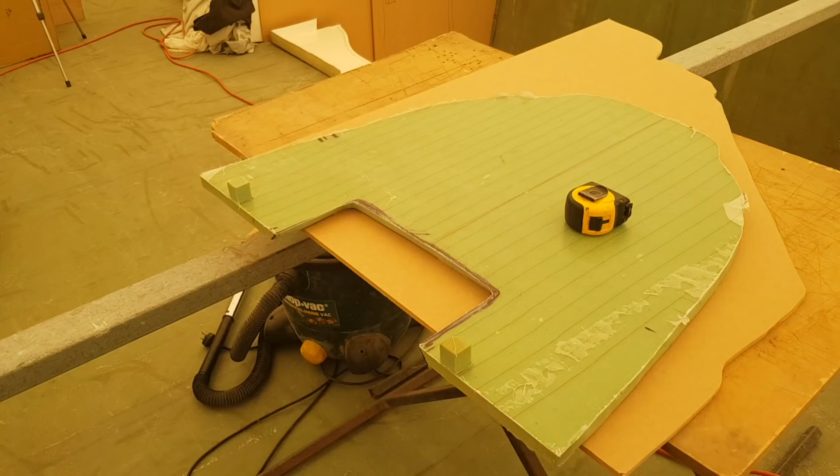So I'm going to use an existing bulkhead. Now, this one actually belongs under this companionway over here at the end of that fuel tank. So the great thing about this is it's almost so close to the other one. I'm going to cut an MDF template and then trim it down rather than get the chain jig in under that bulkhead over there, because it's going to be a bit of an effort. But I'll use this one.

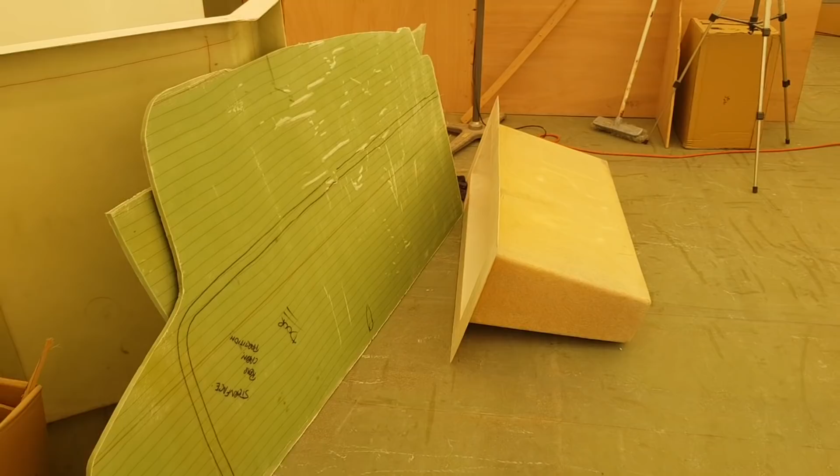You'll notice this mark here. It's actually going to be lower than the floor level. I'm going to allow around 10 centimetres on top of the floor, on top of the tank, to allow for pumps and for hoses and any sort of extra plumbing I need to fit in there. So I'm going to cut this one across here, and then I'll be able to see if it fits, and hopefully it'll transfer to the other side, which I'll do an exact replica on the other side. So I've got 300 here, 300 on the other side there.

One thing you don't realise when you build a boat, like if I was building a monohull, you go down into the hull and you're there. With this bastard, you're up, down, up, down, up, down, constantly.

Hot work, guys, hot work. Right, so I'm down in the build again, but I think the 80th time today.

Got my tunes on in the background, but I'm trying to work out the water tank, and my water tank's actually going to be integrated into the hull. So I'm going to put a bulkhead, another bulkhead, and then a centre baffle with holes in it to allow the water to flow in between and equalise. So I don't end up with sloshing of 150 litres going from one end to the other. So it's a 300 litre tank, 2 end bulkheads, and a centre. And I think that should suffice.

I've done a bit of reading. That seems to be the way to go. So I've used one of the existing templates of the bulkhead, which is about a foot and a half back from this one. And this one here is going to form the back end or the stern end of my water tank, so hopefully it'll fit.

Right, so this here is the stern end of my freshwater tank, and that bulkhead up there, I've actually, luckily, haven't cut out the limber holes yet because I'm not going to, it is the forward end or the bow end of my water tank. I've got to make a baffle somewhere in the middle here, which will just be another bulkhead with some holes in it, so it'll stop the water from flowing back and forth.

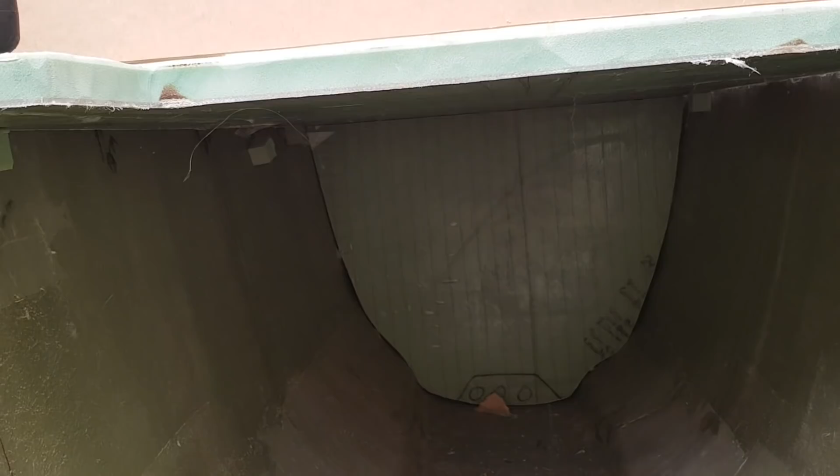So what I'm going to do is try to avoid lifting this bulkhead, the 2 modules out. I'm going to try to chain jig it while it's actually inside, underneath the floor here. Hopefully I'll be able to get in there enough to be able to get a chain jig going. It's not going to be that dissimilar to the back one, but it certainly will be narrower.

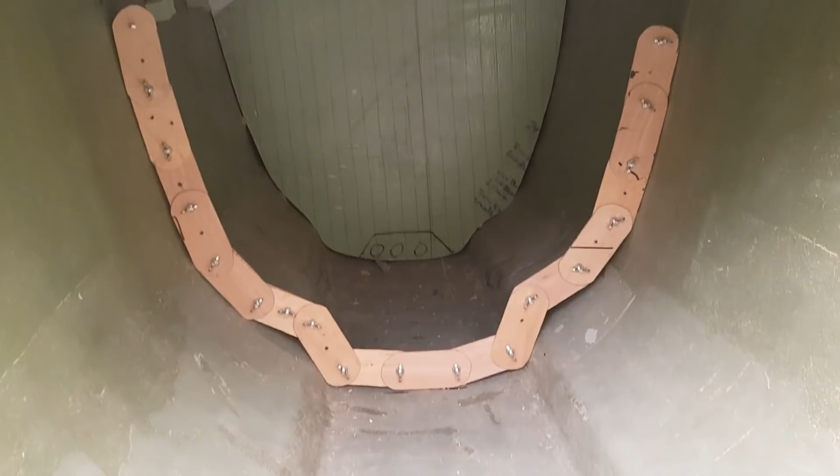Going to need a bit of CAD here, a bit of cardboard aided design, but that's pretty much in the perfect spot. I think I need another biscuit on this side. I want to go full height, and then I'm going to cut it back down. I find that a bit easier than sort of half doing it.

It's like a scene out of The Great Escape. Freaking hell, yeah, she's a bit tight in there. I'm a bit over being in there, but it took me about 10 minutes to get that done, so 10 minutes was long enough. It was like having a freaking MRI in there. The things you do, eh? The things you've got to do to get shit done just cracks me up. Under there you've got to get under and get it out without altering it, and you could.

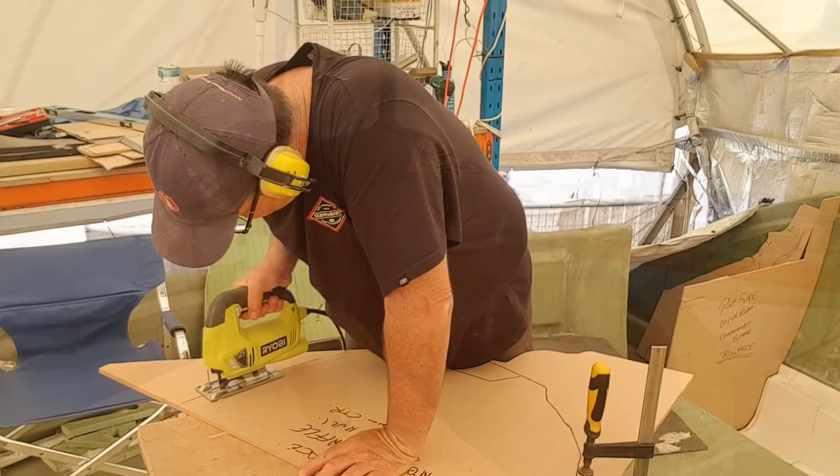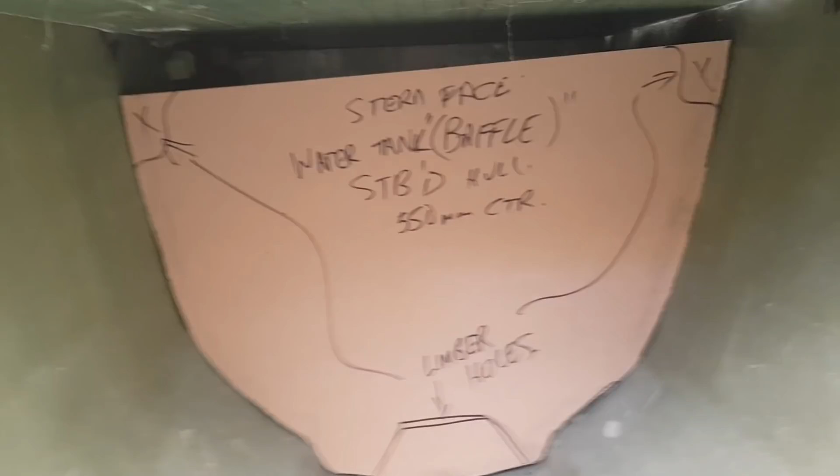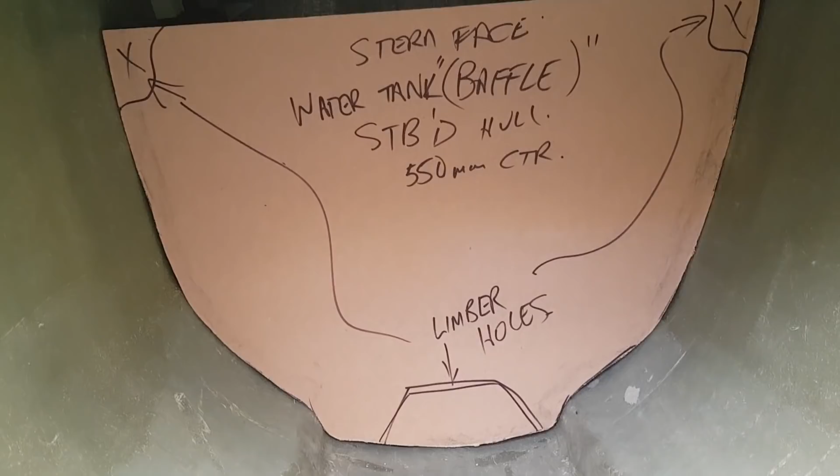It's not very level, I have to try to get it level. That's going to be a bit of a challenge until I lift the roof out, or the floor out, because that's got to come down about 5 centimetres or so. But it's in there, and I should be able to cut a foam core version of that straight away, and get these in straight away virtually.

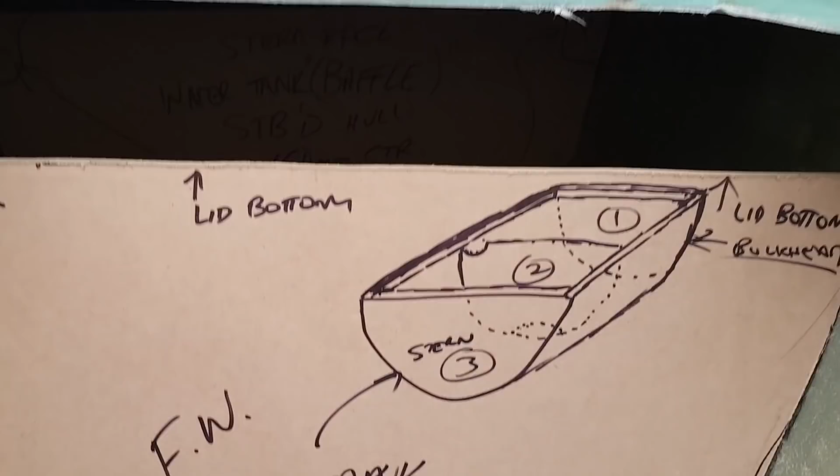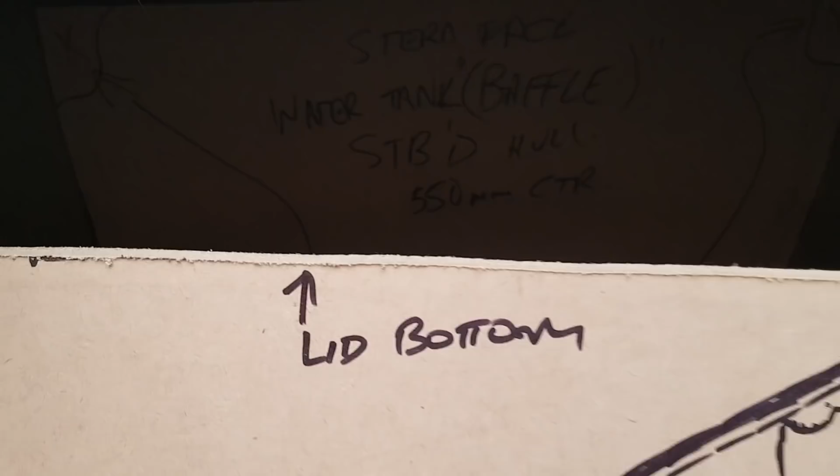So you get the idea, this is what I'm aiming for. This bulkhead here you're looking at is actually this one, another one here with a couple of limber holes in the middle and along the top, and then the forward one is actually the proper bulkhead. So I can essentially look in here now, and there's the second bulkhead in there, and then there's another one in front of that.

So that's my water tank, guys, that's how I'm going to do it. I'll show you a picture of how that's going to be done, and we'll go on from there.

The time's come to work out where the fuel tank fits, and I've made my template. I've just got to make some smaller bulkheads with some limber holes in them with a V in them to carry the load of the tank.

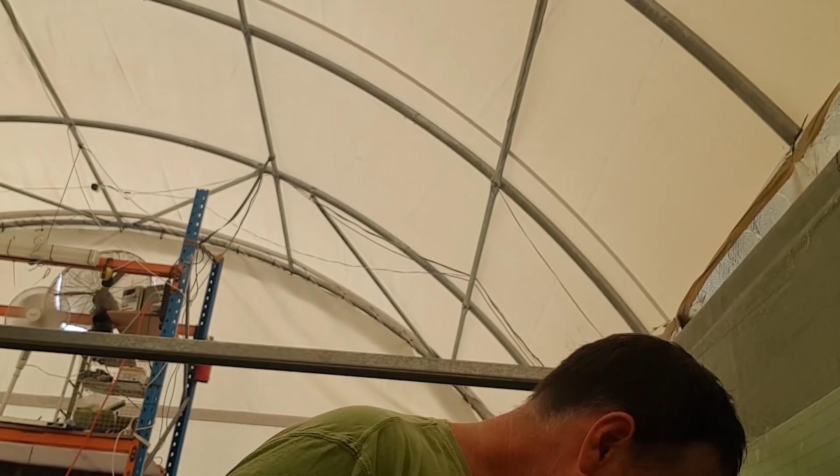I can't just sit the tank on the bottom because I want to have a clear flow of water underneath to the bilge. So I'm going to do a chain jig of each of the sections with a small flat edge on it as well. I haven't quite worked that out yet, but I think that's going to be more than enough to support 300 odd kilos. Shouldn't be an issue with the foam core, but it's going to have to all be sealed and tabbed in just like a bulkhead.

Okay, so this is the first of my fuel tank bulkheads. It's going to be around about here and down, and then it'll have a notch in it with a V in it to hold the tank.

Okay, so you see what I'm getting at here. This idea is to hold the tank in a cradle, and then what I plan to do, whether I do it or not, is to put some holes in here, reinforce them with carbon or something, multiple layers of quadraxial or something, so that I can then strap over the tank from one to the other.

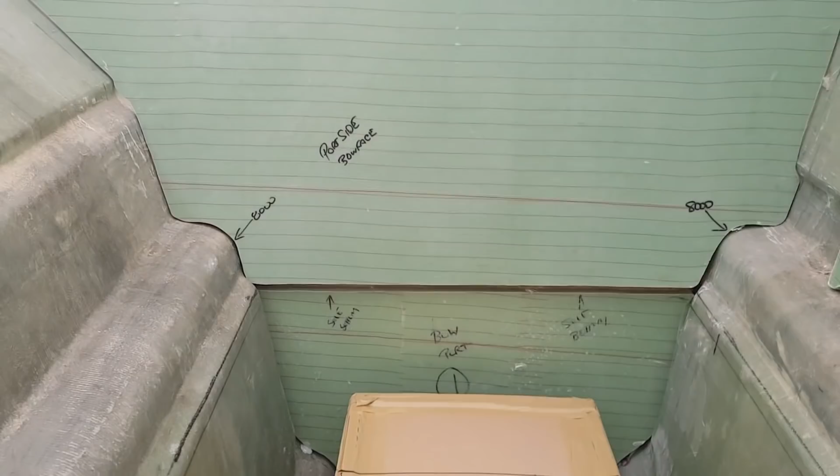You can see what I'm trying to achieve here. I've actually put this chain jig in here. I need around about 50 millimeters or 2 inches on either side of the fuel tank here as a brace, and then I'm going to cut a V in it. But I'm trying to ascertain the height here, so I'm going to have to level this tank up and make sure I can get a reasonable level all the way through. The issue is it gets a bit narrower as we get towards the engine room, where the strap mounts are across here. In fact, the tank's around the wrong way, but where the strap mounts are, that's where I want to have these braces so I can tie this into the hull.

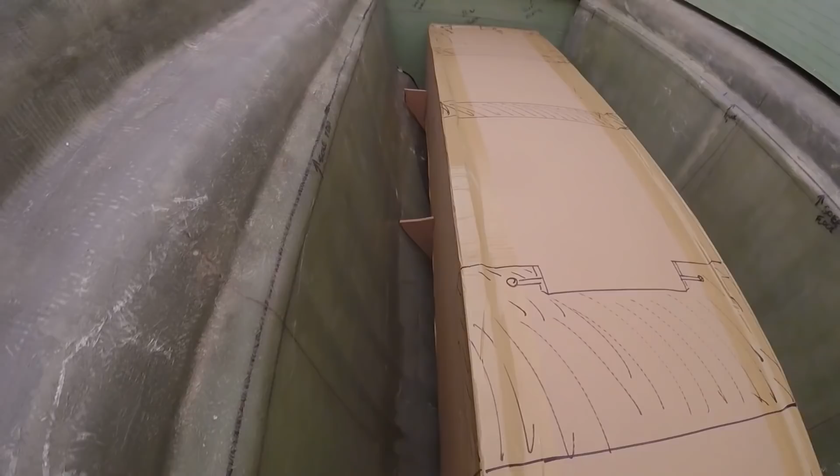I have all my fuel tank bracing templates for the bulkheads that I'm going to put in. What I'm going to do is each one of these at the top and cut it out.

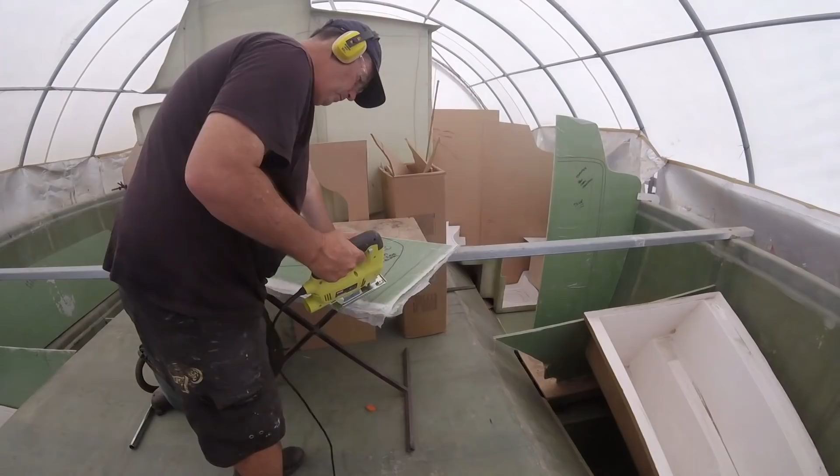So I guess a few of you are thinking that these bulkheads are going to impart quite a pressure point on the bottom of my tank, or on the bottom edge of my tank. What I intend to do, and I haven't quite worked out exactly how, but I'm thinking possibly a slat bed arrangement like you'd put under a mattress, or even increasing these bulkhead tops or the surfaces touching the tank to make it a little wider, just to increase the surface area that's actually touching the tank.

Now, it is a polyethylene tank, and now that I've received them, I can tell you that they're around about 1 centimetre thick, so there's a substantial thickness to deal with. The great thing is I think it's probably going to just require some extra width on the top of the bulkheads rather than a full slat bed. I'm open to any suggestions, but I haven't quite done that yet, even at the time I'm publishing this video. The next part of the process is to do the other side.

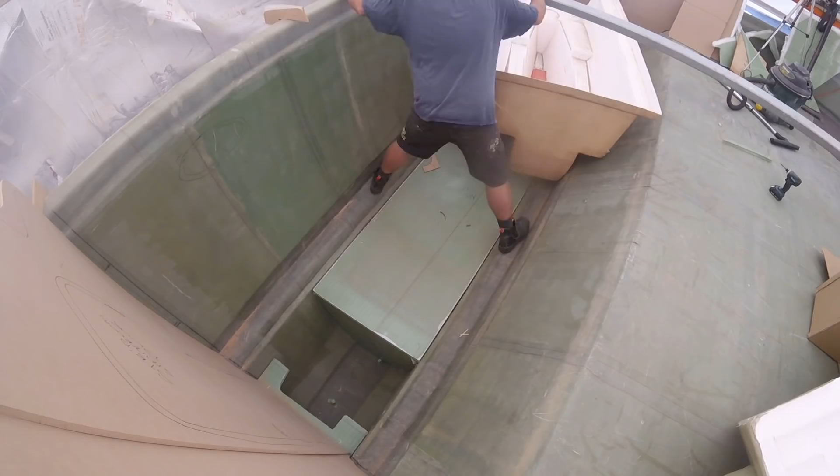Now, because I'm building a catamaran and not a yacht, you guys get the absolute pleasure of watching me do it all twice. So I'm going to speed this side up just to make it a little bit more interesting for you. I'm not going to go through the detail like I did before, but as you can see, it's a lot of lifting, a lot of moving, but the thing is I get to do everything twice, and that's the great thing about it. So I should be pretty good at what I'm doing by the time I've done it twice, you'd think anyway. So enjoy this, guys. This is the fitting of the starboard side bulkheads.

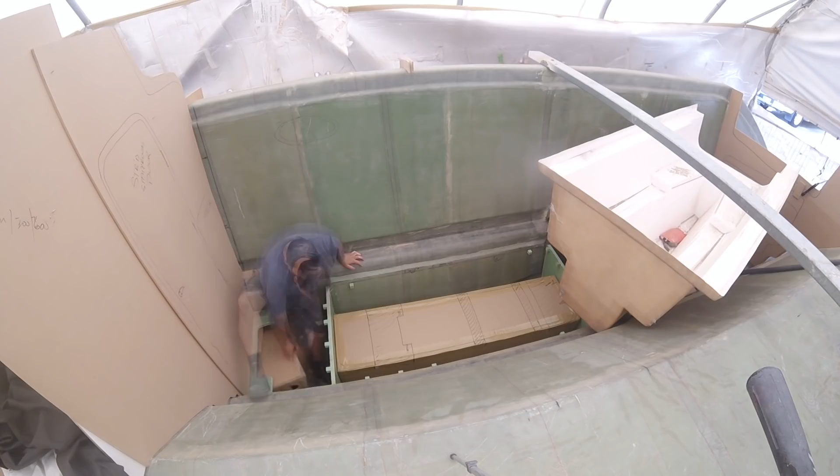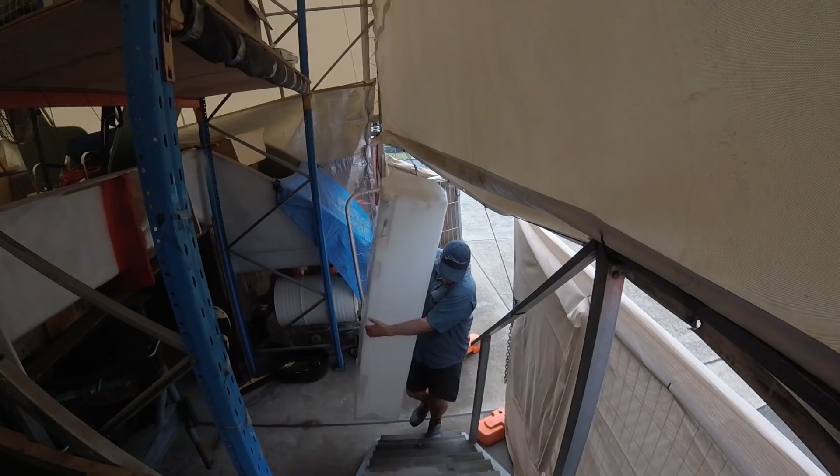It's a little bit of an exciting day. Up until now, everything that has been in the hull here, like absolutely everything, has been made by me. It's time to start introducing some foreign bodies, some aliens into the mix. My fuel tanks have arrived, and they're pretty impressive.

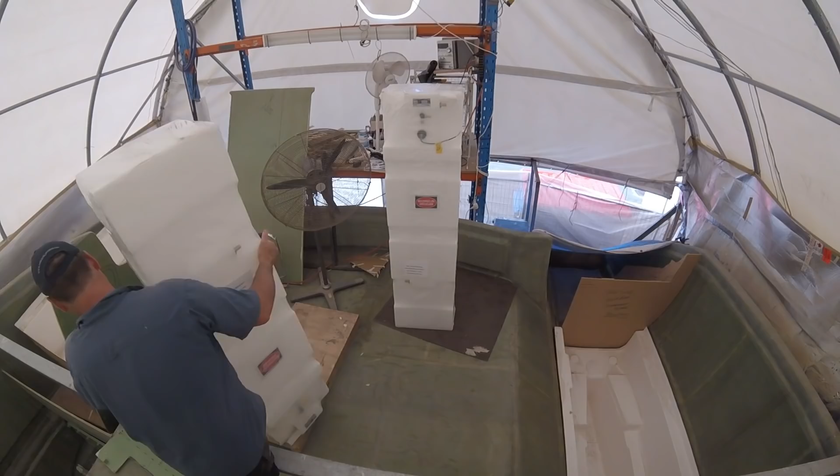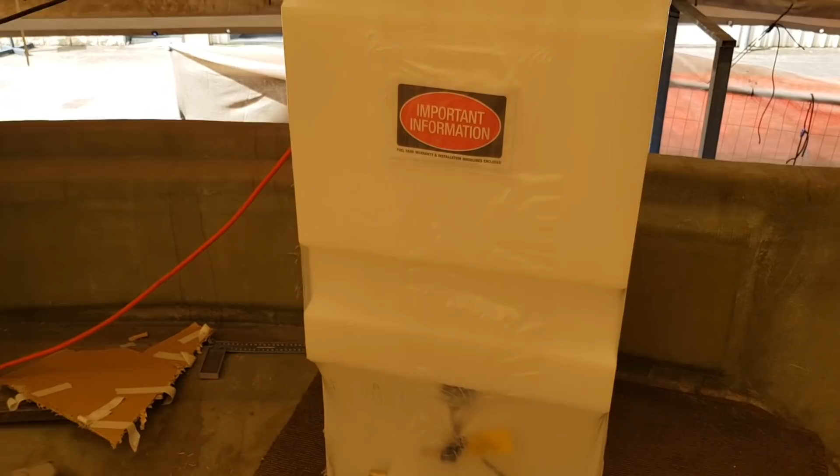They're polyethylene rotational molded. I was going to look at aluminium, looked at making fiberglass. These ones are pressure tested, survey rated, and come with all the fittings, senders and everything ready to go. Okay, so you can see here we've got some rebates here to put straps so I can tie them down. Also gives it extra strength on the top here. We've got a breather valve here, and down the bottom here, sender, intake and return, and then a filler spout here as well.

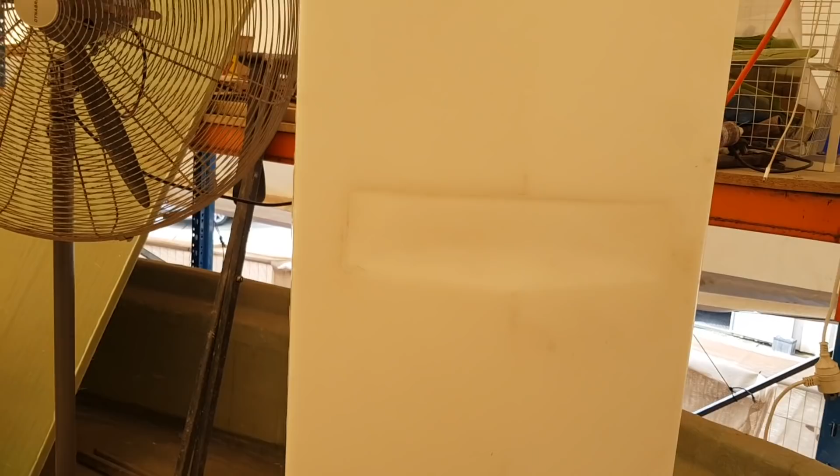And you'll notice also that it's actually been pressure tested, and it has a badge on it stating the date of manufacture. Now I need to leave that on for survey requirements, but these are pretty cool. It's actually got a baffle through the centre of it to stop any wave action. So it's got quite a large baffle right up through the centre of it here that will reduce that action that happens inside a tank. Yep, so pretty happy with that.

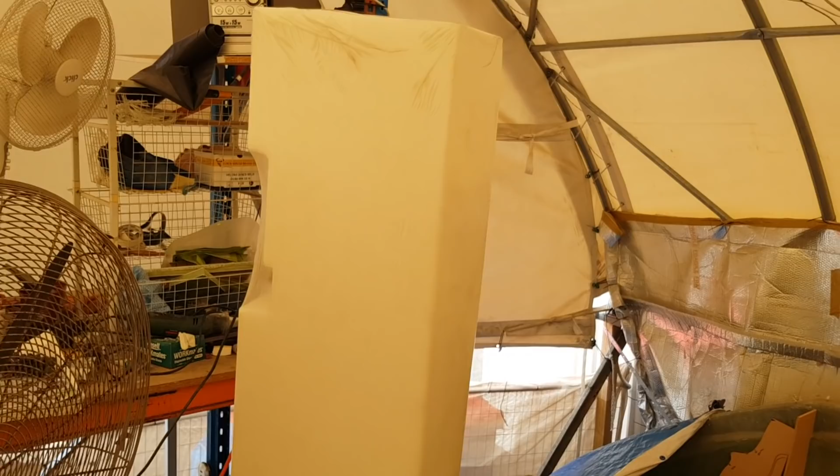I'm going to try and put one in. They're bloody heavy. I reckon they're about 35 kilos, so probably well worth the investment. And they weren't that expensive, to be honest. I couldn't have made it for any less. I think they're about 750 Australian each, and about 200 bucks to get them delivered, both of them, with Richard, our kayak courier.

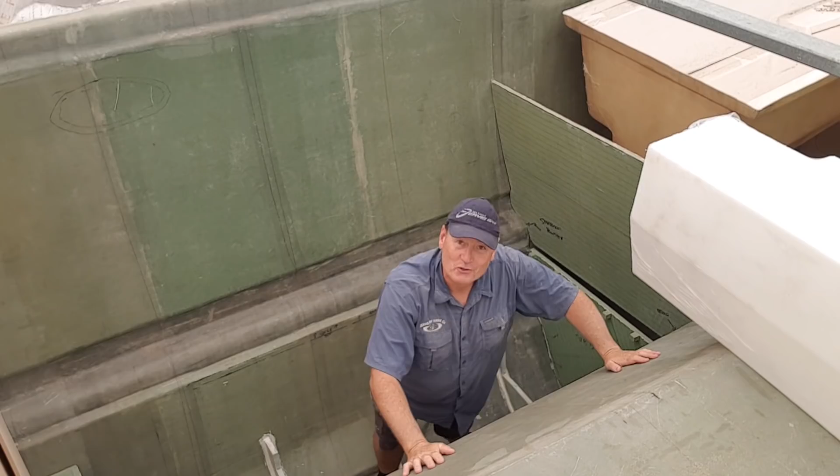I want to do a dry fit, but it could be permanent, depending on how hard it is to get in. I've still got a lot of work to do down here, but I've got to set it in to make sure that I've got my dimensions right.

Very cool. Very, very cool. Man, they are absolutely...

So blackwater, bulkhead, fuel tank, all providing structure, but also nice and solid. They're actually pretty much wedged in there. I've got a lot of room for my services in. Should be able to do it through the back of a cupboard or through a floor hatch. There's a couple of accesses along here. There's one there over the fuel sender.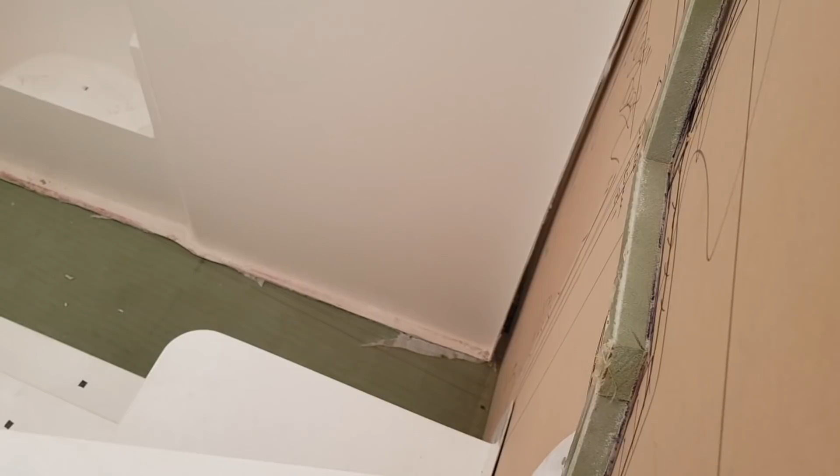I'm considering putting another one in here so that I can get to each side of this, because there's a lot of room here for strainers and all this other work that I could keep out of the engine room, which would be nice to be able to service it. Service filters, water filters and all that sort of stuff. But yep, for now the water tank actually starts here and goes forward underneath this robe module here. So all my services are all in one place. I've got access to everything.